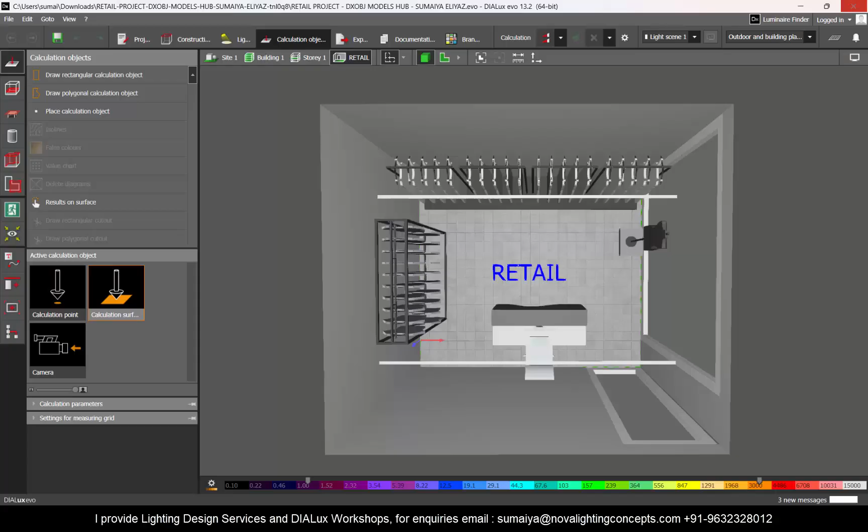So let's get started. In the first part, I have considered a sample project. Here, my DIALux user interface language is English. When you go to the documentation to export your Lux report, my documentation too is in English.

To change this, we'll go to File, Settings, General Settings. Here you have Language, User Interface. User interface means the language in which you are using DIALux, that is your user interface language.

You can change it to a different language. If you change the language here, only the DIALux tools language will be changed.

Suppose if you want to keep it in English itself, or your native language, and you want only your Lux report to be in a different language, you can select this dropdown. Here are the different language options you can change to.

Now, suppose I scroll down here and choose this language, and I go back to documentation, wait for a few seconds, and your Lux report will be in the language you have selected. Now my Lux is changed to the language I have selected.

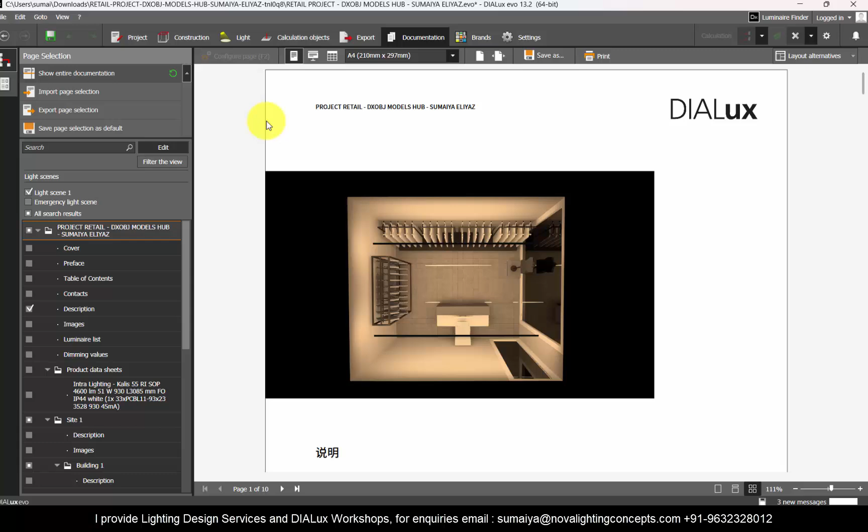Click on Show Entire Documentation and this is my Lux report, and here all the details in the report are in the language I have selected. So this is how you can change the language.

From here you can save as PDF, report 1. This is your Lux report.

When you go to the settings here, File, Settings, General Settings, the number of languages in which you can export your Lux report is limited. For example, I don't have Arabic here to export my Lux reports in Arabic language.

Or say your regional languages too, you don't have here. Now how are we going to export or generate our Lux report in languages other than these?

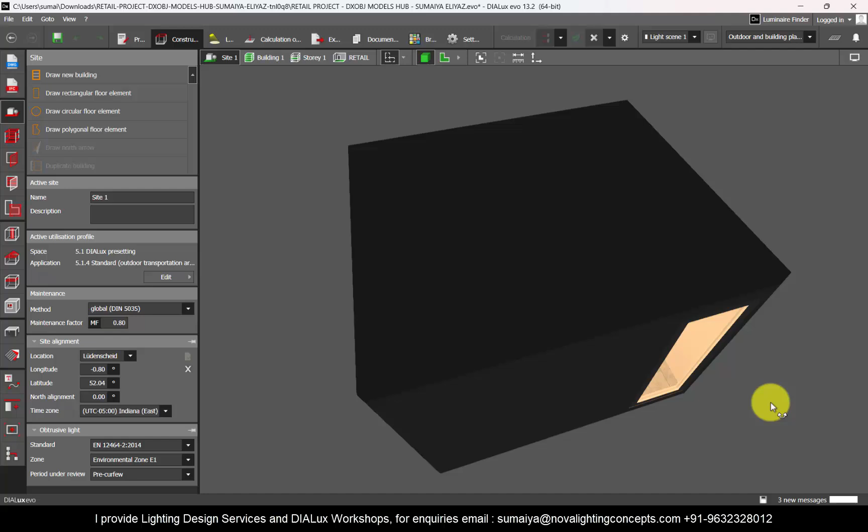Let us see that. If you change the settings and want to get back to normal, you can click on your option and go back to project. You might have to restart your program and everything will be back to normal.

Now, in the second part, we'll learn how to get the DIALux report in languages which are currently not supported within the DIALux software.

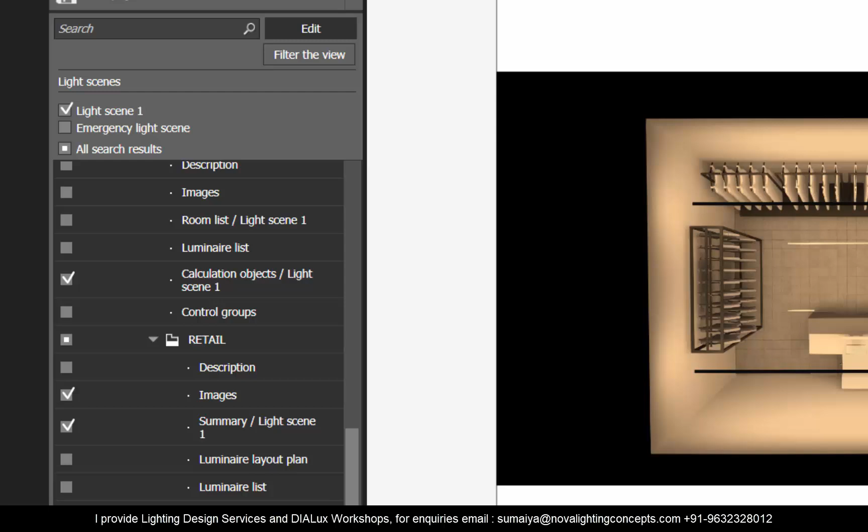For that, let's go to the documentation. I have already selected the pages which I need in my Lux report. It totally depends upon your workflow and project requirements which pages you have to keep.

I have a detailed tutorial on this, you can refer to that tutorial. Now, once you have selected the pages you need in your Lux report, you will click on Show Entire Documentation.

If you have a Pro feature, make sure Pro feature is activated. Okay, we'll be in Report.

From here, you have the option to generate your reports in different page dimensions. For now, I'll keep it in A4 itself.

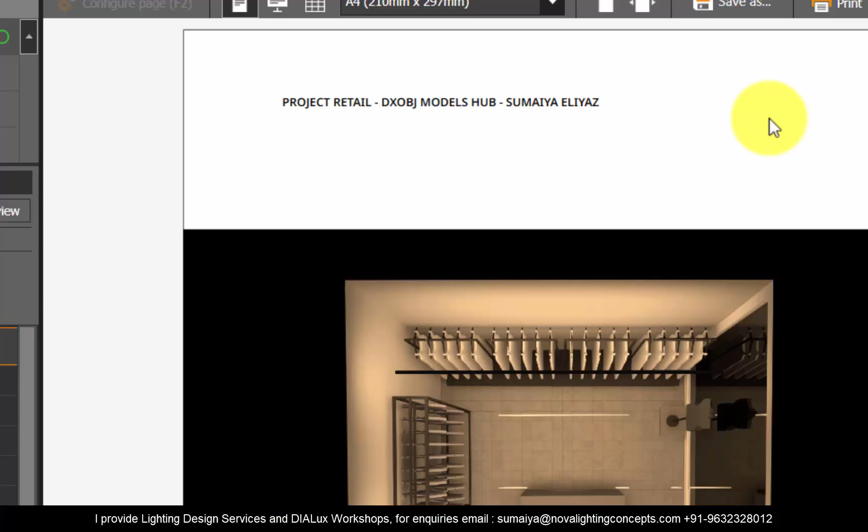And we will save this report in Word document. Let us save the file as report 2. Open file - this is our Lux report in Word format.

When you export your Lux report in Word file, all the text formats, the alignment, everything will be intact, same as your PDF version.

The advantage of exporting it in Word is that you can easily edit this sheet and you can even translate it. Here I'm using WPS Office to open and edit my documents.

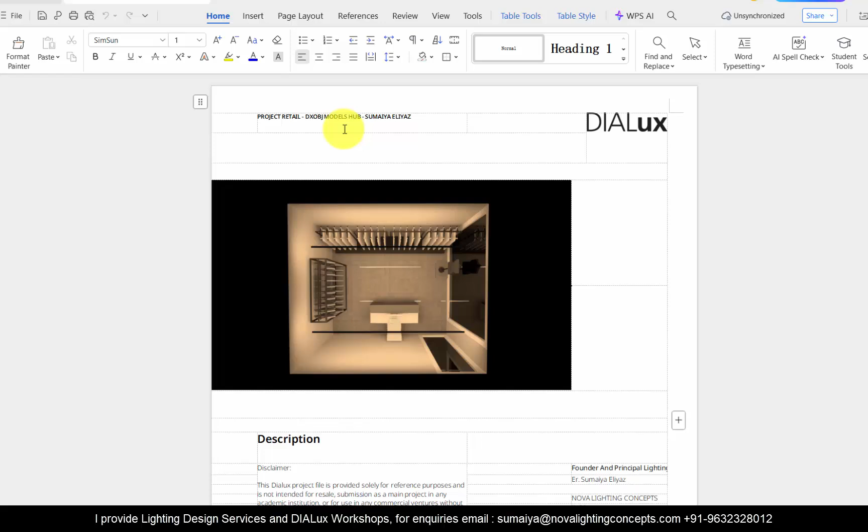You might be using MS Office, you might be using WPS Office, or any other software packages used to create, open and edit documents like this. No matter which software you're using, you go to Review, and in the review option, you will be having one tool for translation.

Here I'm using WPS Office, and I have an option for parallel translate. Click on parallel translate. My language of the document is English and I want to convert it to Hindi. It is translated, and if I scroll down, each page is translated and you can save it from here.

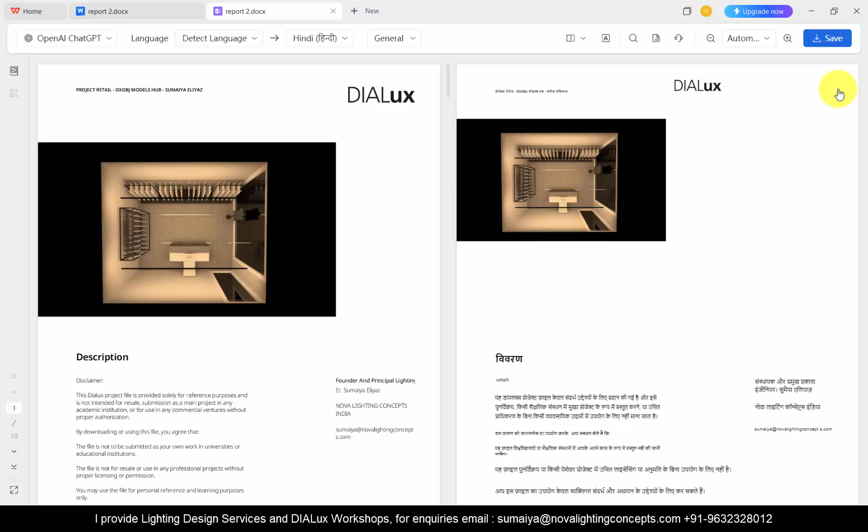Now it depends on the type of software you're using, whether you can download it for free or if you need to have some license for the software. I will tell you a few easy free software options which you can use to translate these Word documents.

The first one is m365.cloud.microsoft. I will provide the link in the description. You just need to log in with your Gmail and you will get access. From here you can click on upload, and this is our Word document of the report. Open it, and it will take a few minutes to upload. Then this tab will open, which shows your report.

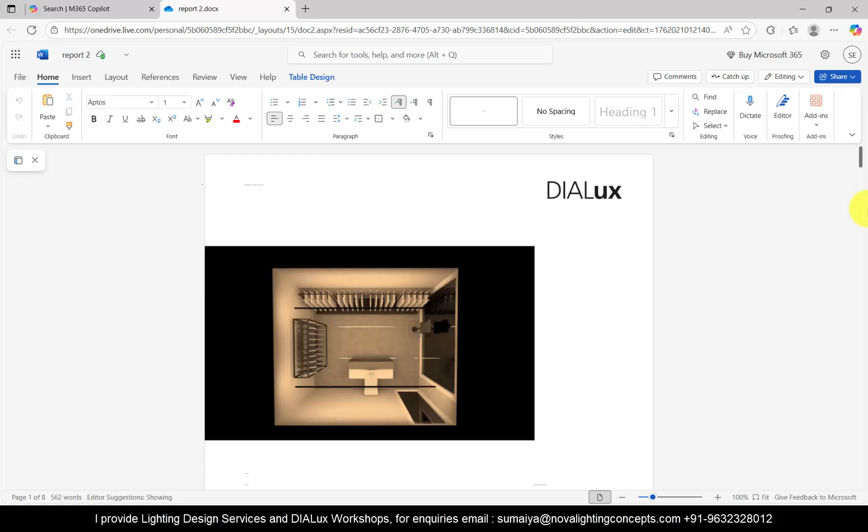You go to review, and here you have the option for translate. Select translate and translate document. If you scroll down the document and can't see the complete text, don't worry. When you translate, all the text will remain the same as your original document.

We have to translate this document from English, or you can keep it auto-detected, and here you select the language you need to translate it into. Suppose I want to translate it into Arabic, because we don't have Arabic language in DIALux directly. Click on translate, it will take a few minutes, and here is your Lux report in Arabic.

Close this one. Then you can click on these three dots, and you can download this as your Word file itself. If you need to do some modifications, you can do it easily in the Word file like this. Click to open. So this is my Lux report in Arabic language.

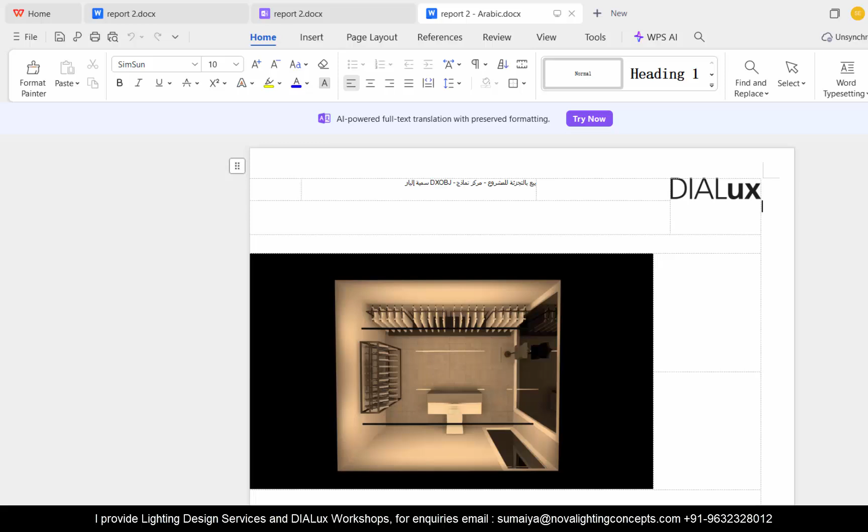Perfect, the layout and text, everything is perfect. The advantage of using the Pro feature and exporting in the Word document is that you can easily change the font size, etc. If there is some mismatch while translating, you can easily edit it. If not, you can directly click on the three dots, download as PDF, and this is your direct PDF translated in Arabic.

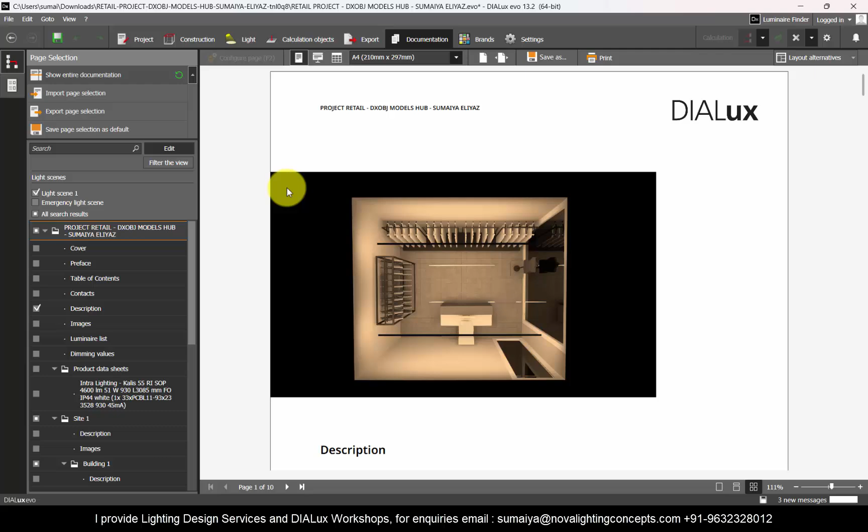Suppose if you don't have the Pro version, you can export your Lux report only as a PDF. Let me save this as PDF, and I will save it on the desktop with the name report 3.

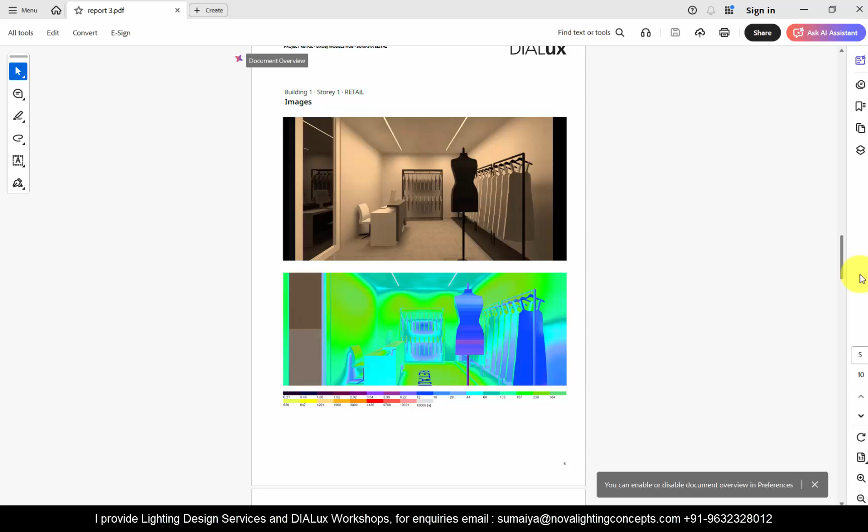Now, how are we going to translate this PDF file into different languages which are not currently supported in DIALux? The easiest option is to go to Google Translate, go to Documents, choose File. This is my PDF. Open. My Lux report is in English, so I will click here, English.

From here, I can select the language I need it exported to. Google Translate gives you a greater number of languages to translate into. See, the options are numerous. Let's select, say, Arabic. Translate.

You can open the translation and you can even download it. Let's take a preview and open it. When you see the report, the text size is very small compared to my original Lux report. Plus, you're getting a watermark saying it is machine translated by Google.

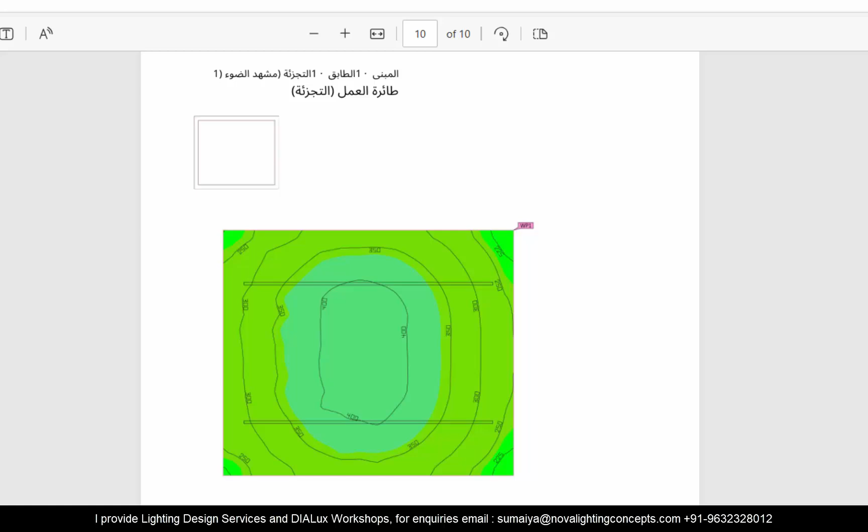If you have a PDF editor, you can edit this and remove it. The formatting can be a little compromised, but the document will be translated. If you're only focused on getting the translated document, you can try this.

There is another option, let's try that as well. This is another site you can use to translate your documents, where you can upload both PDF and Word documents and then translate them.

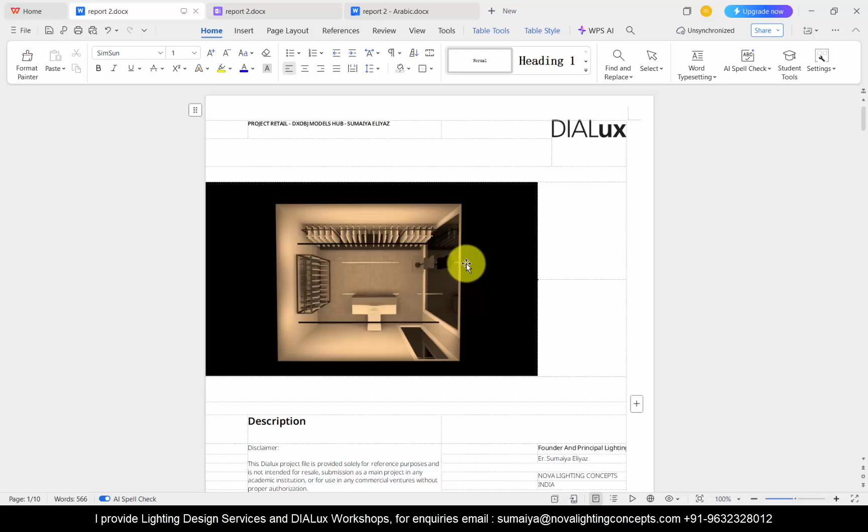I feel the most efficient way, if you need your Lux report in a language which is not currently the DIALux user interface language, is to export your Lux report as a Word document like this, and then easily translate it. The advantage of having a Word file is you can easily edit it.